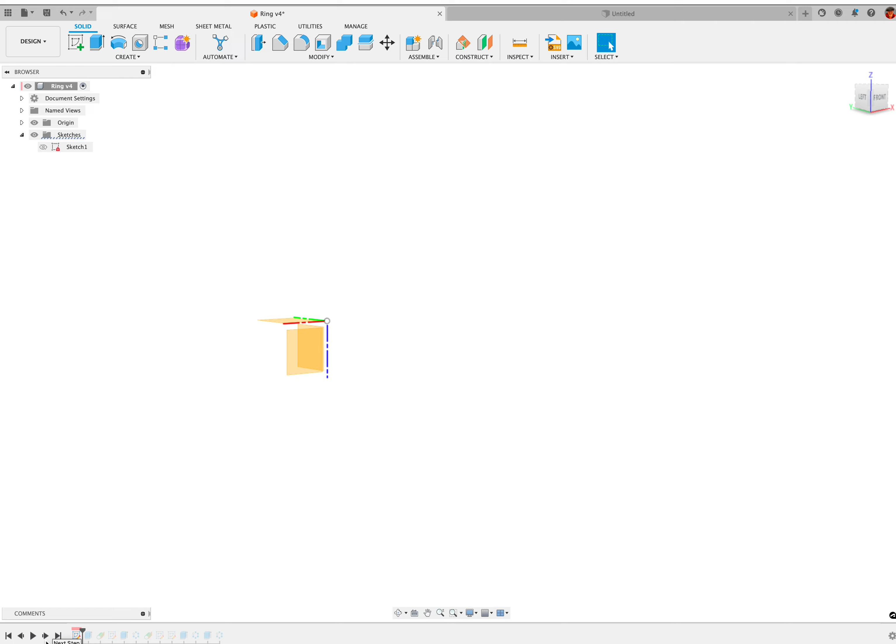All right, so here, this is a pretty normal looking origin in Fusion 360. The first thing I did was to create a sketch here, and we've got two concentric rings. I dimensioned the outside to 70 millimeter diameter and the inside to 60. You're going to need to measure your tailstock and figure out what it should be, and then extruded that in a normal fashion.

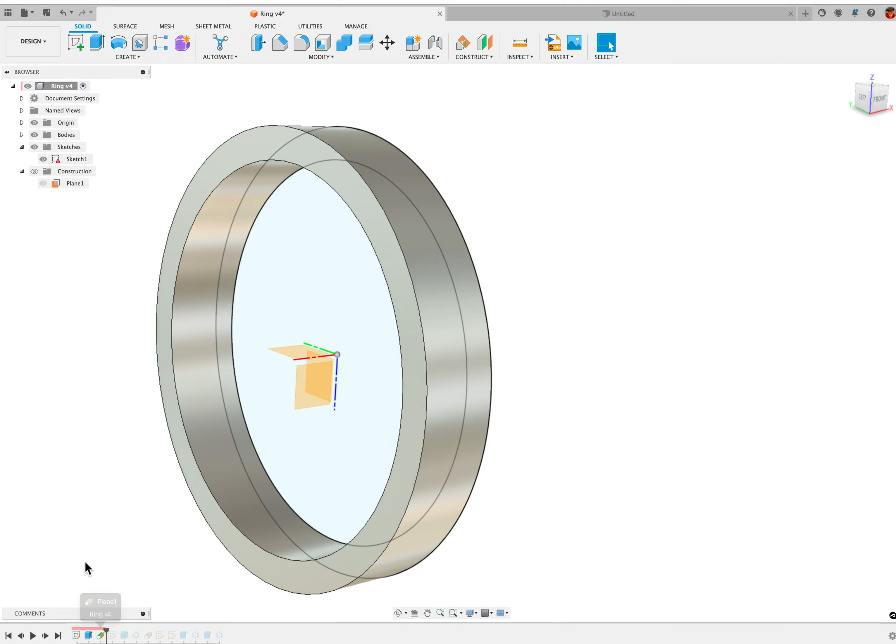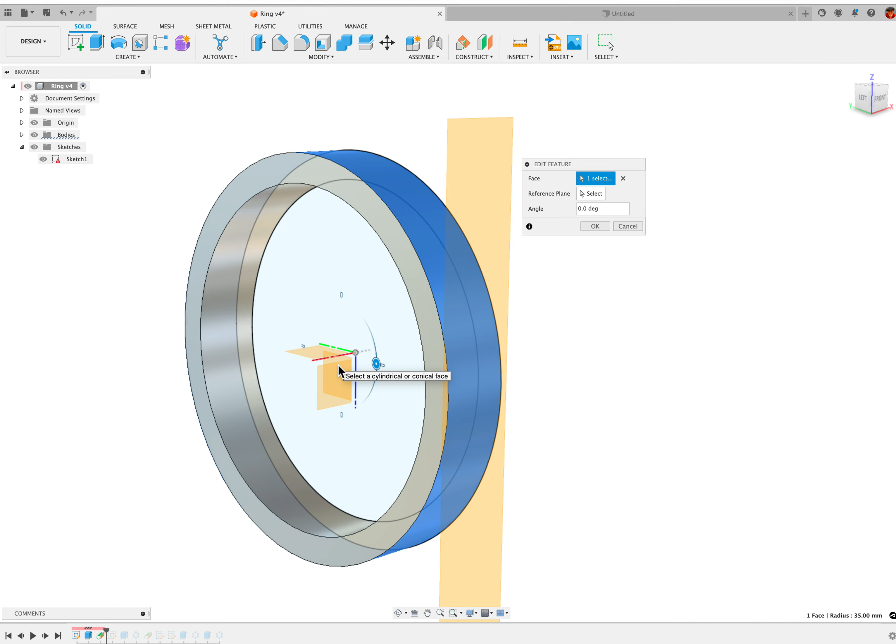So there's our ring, and then the next thing I did was to create a construction plane. Let me show you what the specification looks like for that; we'll edit that feature. So the face is outside of the ring, and this is a tangent plane. I specified tangent plane, and then it needs to know the face, which is the circular feature on the outside of the ring. It also needs to know the reference plane, and that was this center in here, and then the angle was 0.

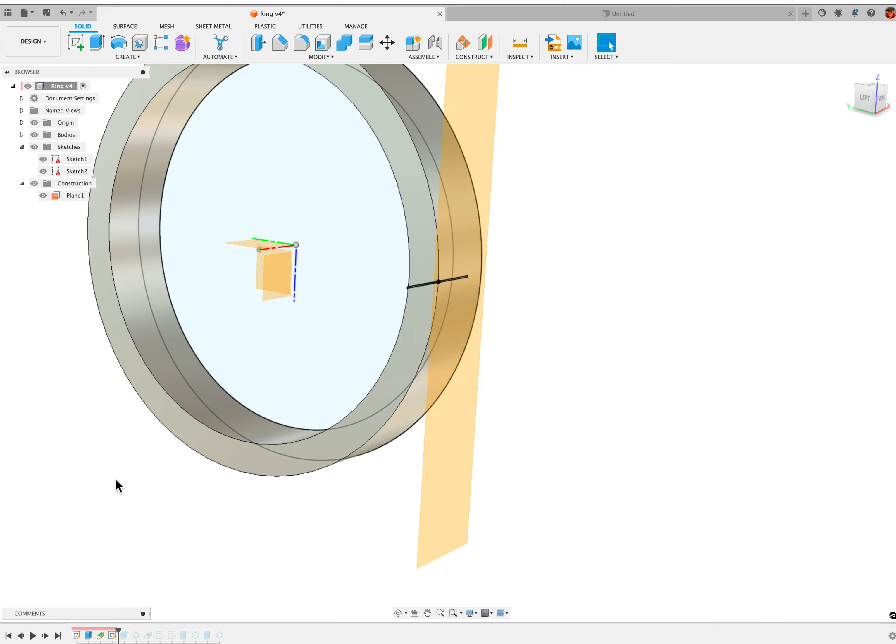So now we've got a construction plane on the outside of this ring that we can sketch on, and that was the next operation. So we created... let's see, what did we do here? There it is. Why isn't it showing? There we go. So there's our second sketch, and you can see it's nothing more than a rectangle.

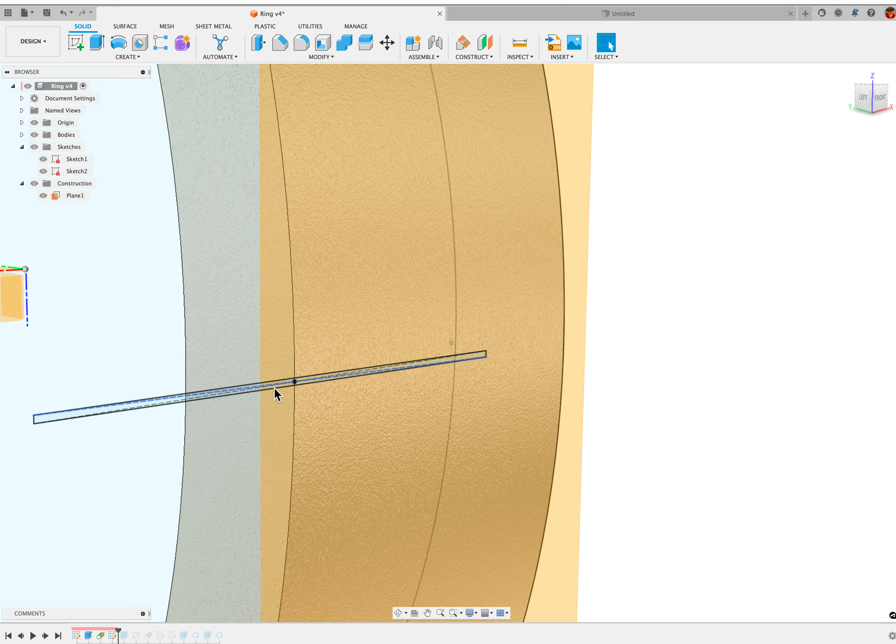I think I have specified 16 millimeters in length and 2.2 millimeters wide. I used a center rectangle and used this edge of the ring as the center. So now that's one of the tick marks.

Then the next thing to do was to extrude that into the ring itself. So let's turn off the construction plane and turn off the sketches, and you can see that that's what's been done here.

Just for grins, let's look at that feature. So it was simple. It was a -2 millimeter extrude as a cut, and that was all that was. So that was pretty simple.

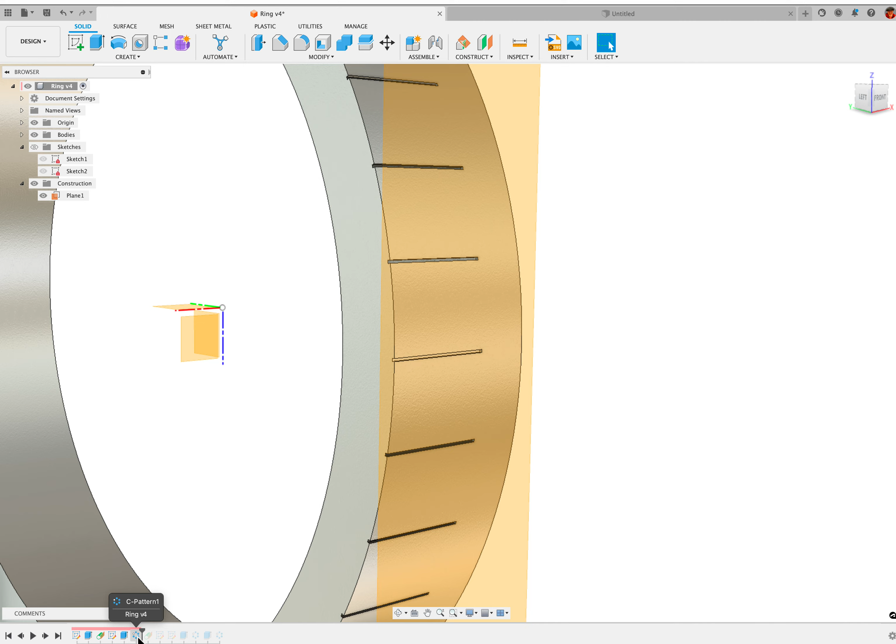I'm going to turn sketches back on here because we're going to need them here in a minute. Then the next thing was to do a circular repeat of that feature, and this is a pattern, circular pattern, which you can find right here. This one here. So here were the specifications for that. I was doing a repeat of a feature and selected...

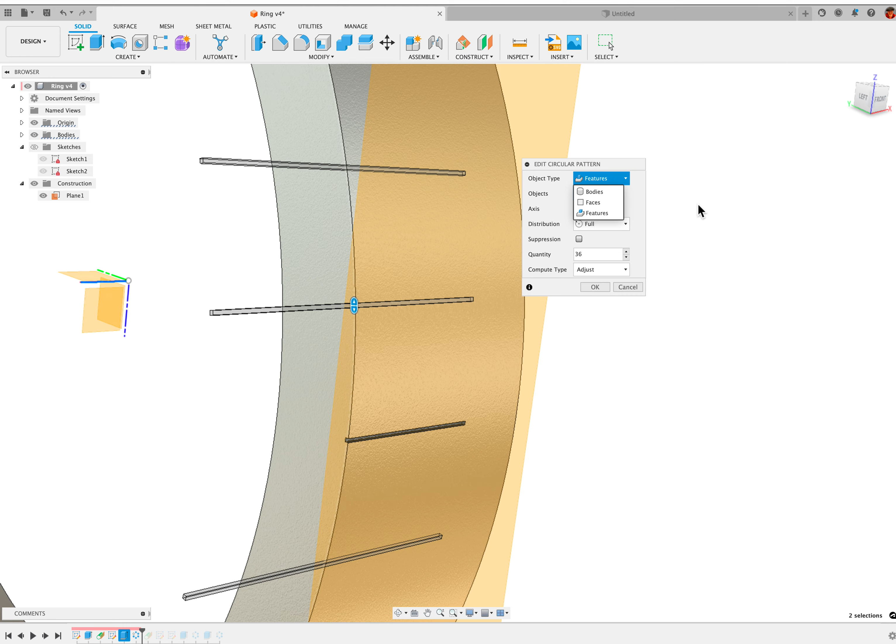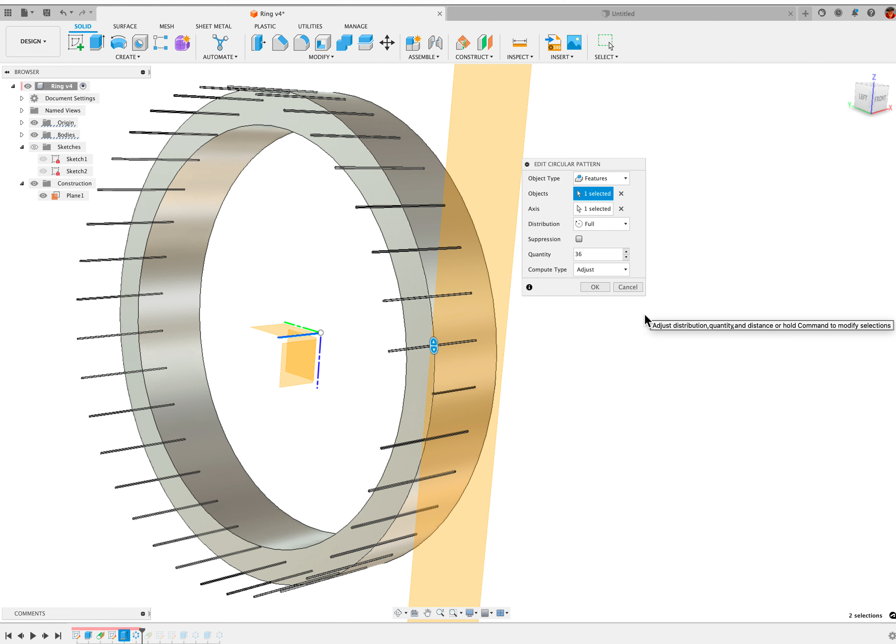...this feature right here, and then the axis was this center axis right here, a full rotation, and I specified 36 of them, thinking this is a 360-degree circle. Obviously your lathe dials are probably not that; you may have two, one for inches and one for millimeters. And the number of tick marks you want around the circle is going to vary depending upon how your ring is actually constructed. So that's what got us those long tick marks around there.

Then the next thing I did was I wanted to start working on the intermediate tick marks between the larger graduations. To do that, I created another sketch plane. You can see it here, and if you look at the side, you'll see it's on an angle. It's tangent to the outside of the ring, but it's at an angle. Let me show you how I did that.

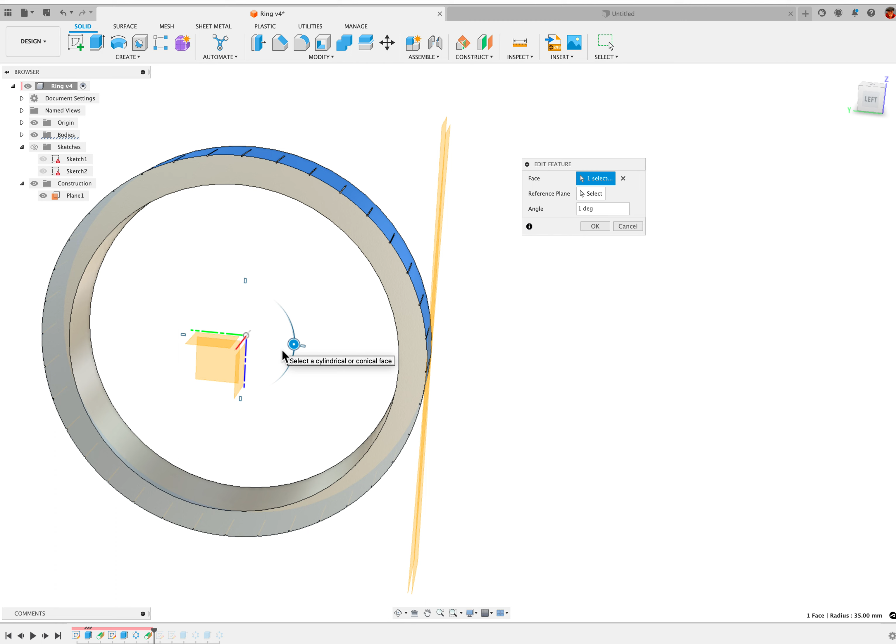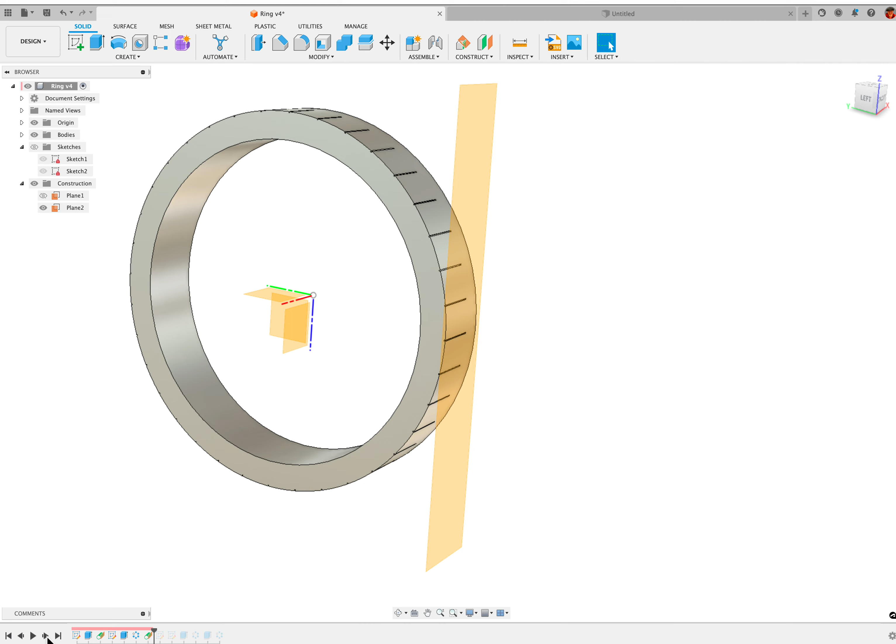So I specified a 1 degree angled offset from the reference plane here in the middle, and we've got that now. We can turn off the other one, but we now have a sketch plane that we can put other features on that are 1 degree offset in terms of clocking rotation around the center axis. So the next thing I did was I created another sketch, and it's right here. Let's see if we can turn it on.

You can see it right there. Let me turn off the origin. That's the sketch, and it's nothing more than a line on that origin axis.

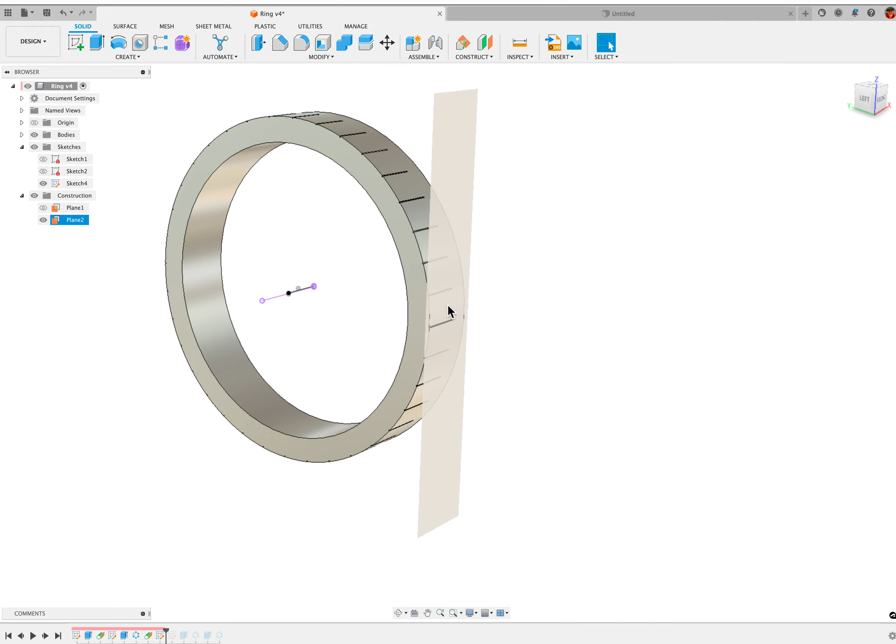The reason I wanted that is I wanted to be able to project that out to this plane so that I can use it as a reference for the geometry I'm going to create with another sketch on this plane. So the next thing I did was actually do that.

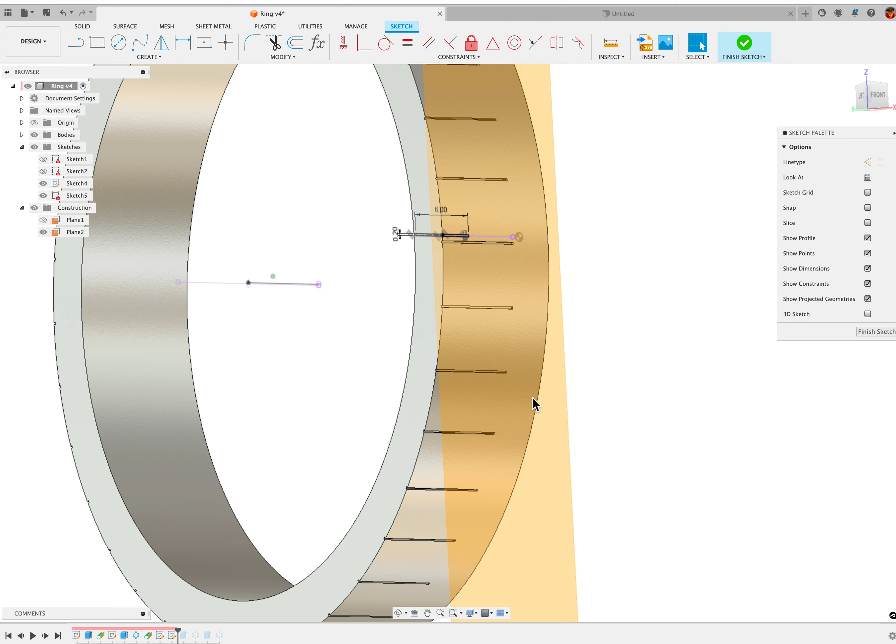I created a sketch here. First thing, let's see if we can... So it's right here. But as you can see, that purple line in there - let me turn off the construction plane. That's this feature I had drawn before, projected out to that construction plane that's 1 degree off in rotation.

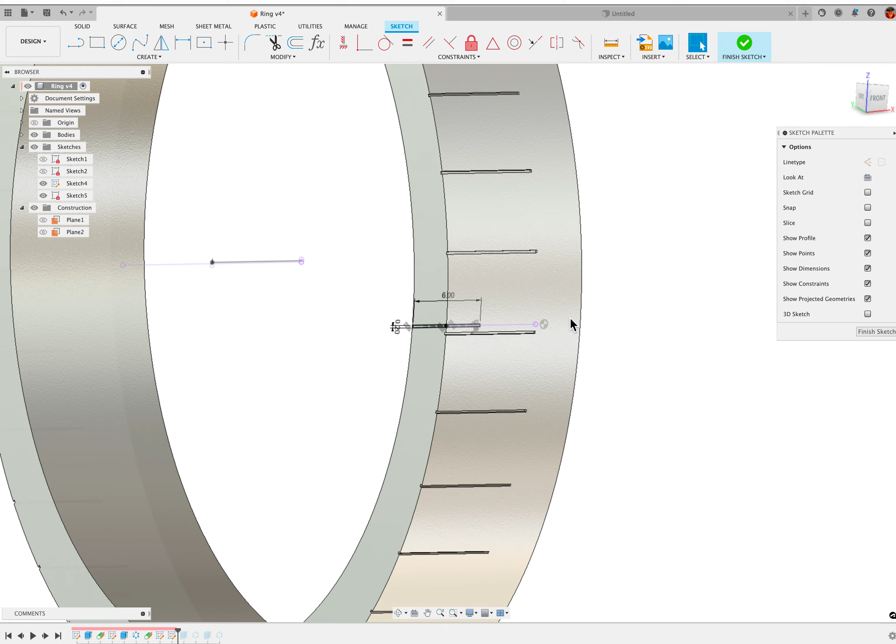And then I used that with a center point rectangle to create another rectangle here on that sketch plane that's narrower. So in this one it was specified as 12 millimeters. This one's 6. So you can probably guess what's next.

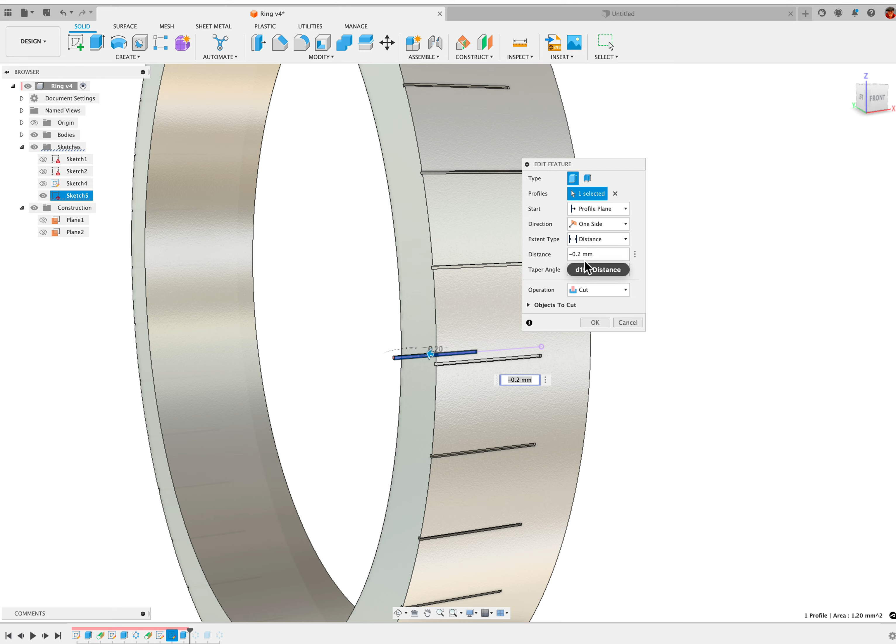We'll finish that sketch. The next thing was - let me turn off the sketches here - to extrude that into the ring again with another cut feature 0.2 millimeters deep. That ought to be pretty understandable.

And then the next thing is another circular pattern, but I didn't go all the way around. You'll know why here in a minute, but I did create 9 tick marks here in between these 2 longer tick marks. So I'll show you the spec on that.

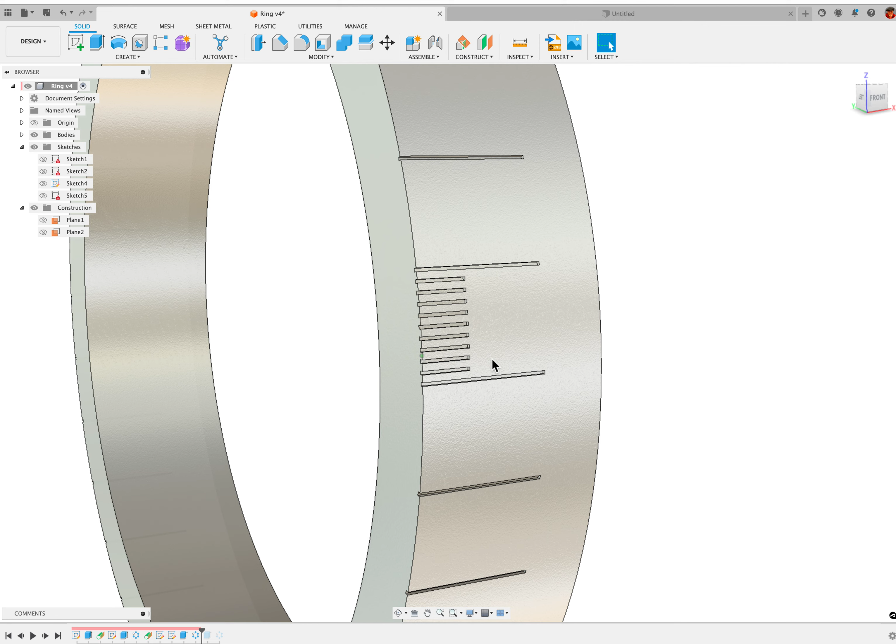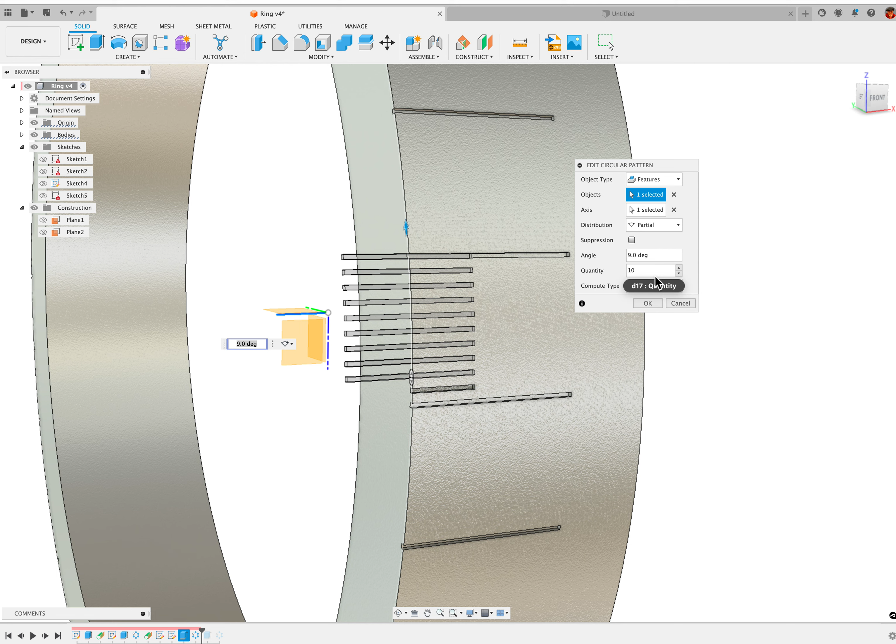It's actually 10 tick marks, sorry about that. So again, doing a circular pattern of features around this object using this center axis of the origin as the rotation axis. It's a partial distribution across 9 degrees with 10 units, and that's what gets those etchings in there.

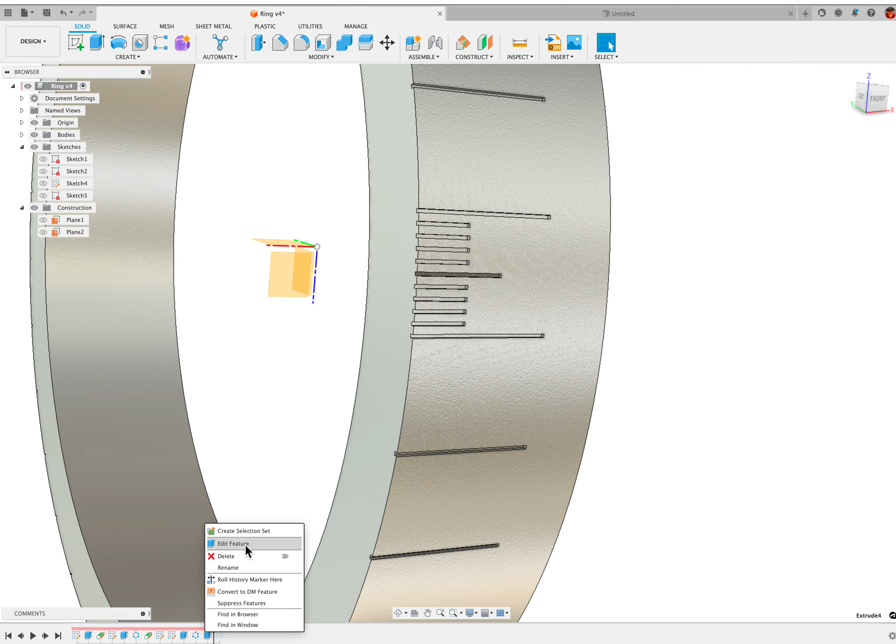Then the next thing was I wanted the center mark longer than the 4 on either side of it, and to do that I used an extrude command, and I simply took this face of that center feature and did another cut extending it 2 millimeters out. So now we have a long center line, not as long as the outside, but I think you get the point.

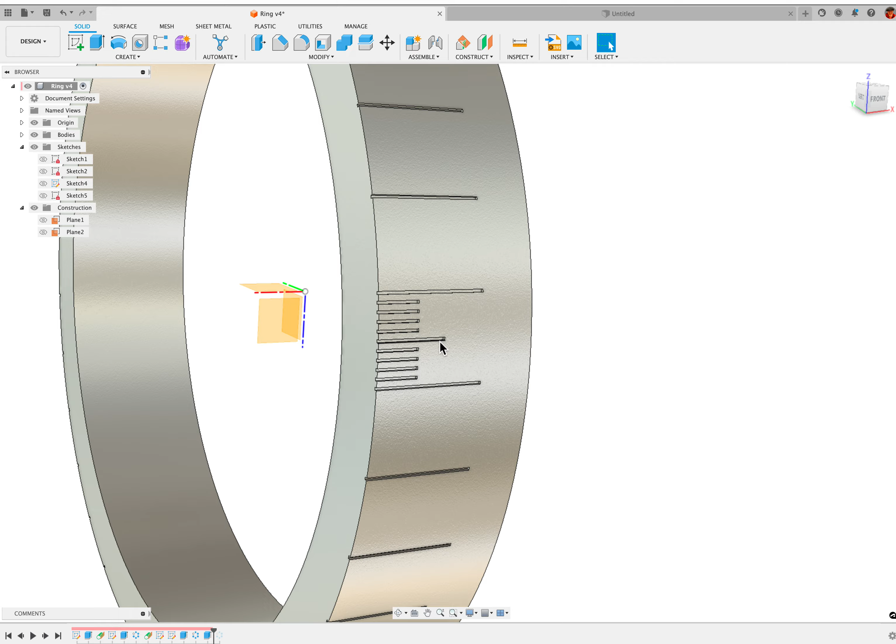And then the next thing was to circular pattern all of these features from this one here to this one here, all the way around in a circle. And we'll do that here. Now this takes some time, as you can see down here, because it's got to compute all the geometry and all the tangencies - it's kind of compute intensive.

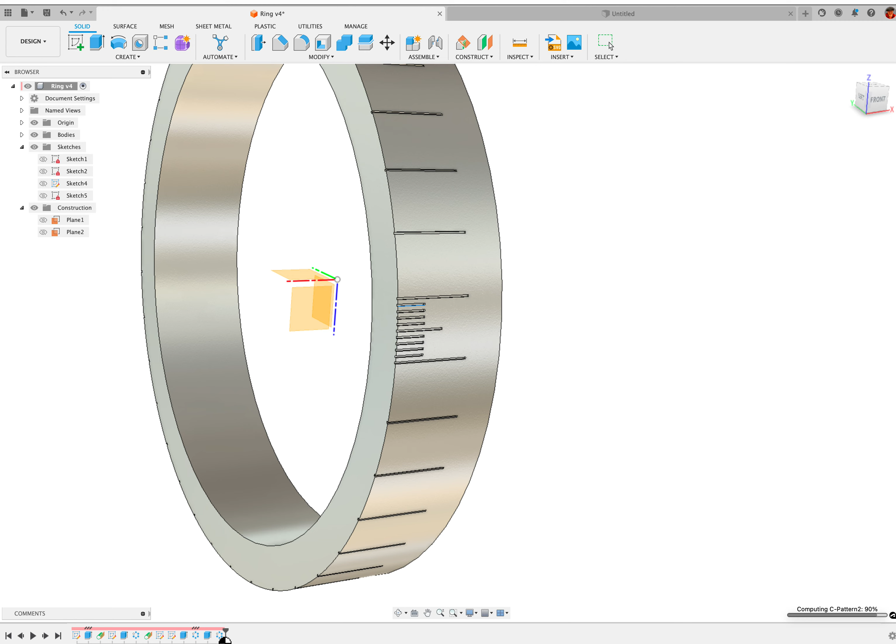Once it gets done, I'll show you the actual spec on that circular repeat. But here, let's take a look. So full rotation again, 36 of them. I picked up all of these features, as you can see, and that's what we got.

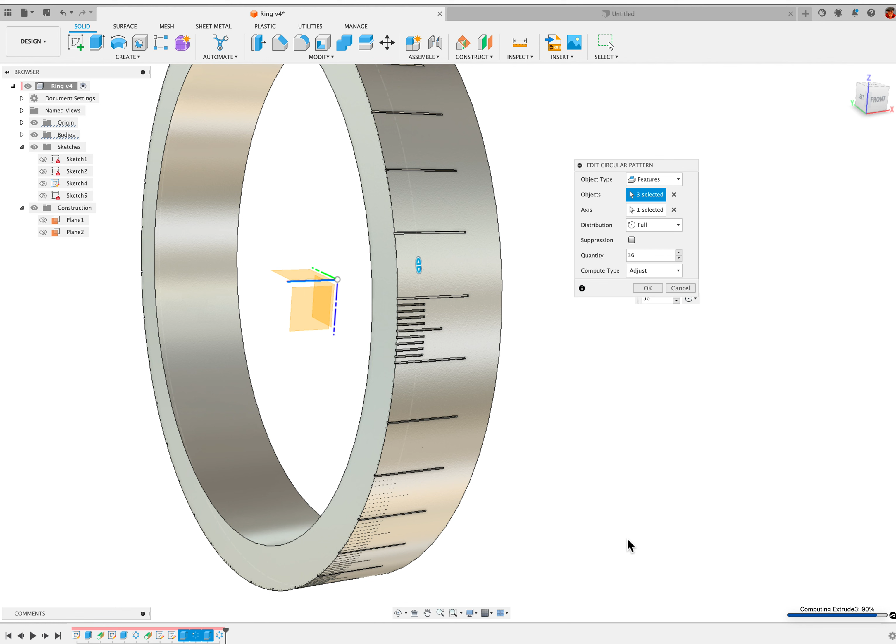Now, in terms of laying text around here, you can certainly do it this way by creating construction planes all the way around the perimeter, offset however many degrees that are necessary. A better approach might be to lay down your text as a text string and then use that to apply the text to the outside surface of the ring, using one of the edges of the ring as the flow pattern for the text.

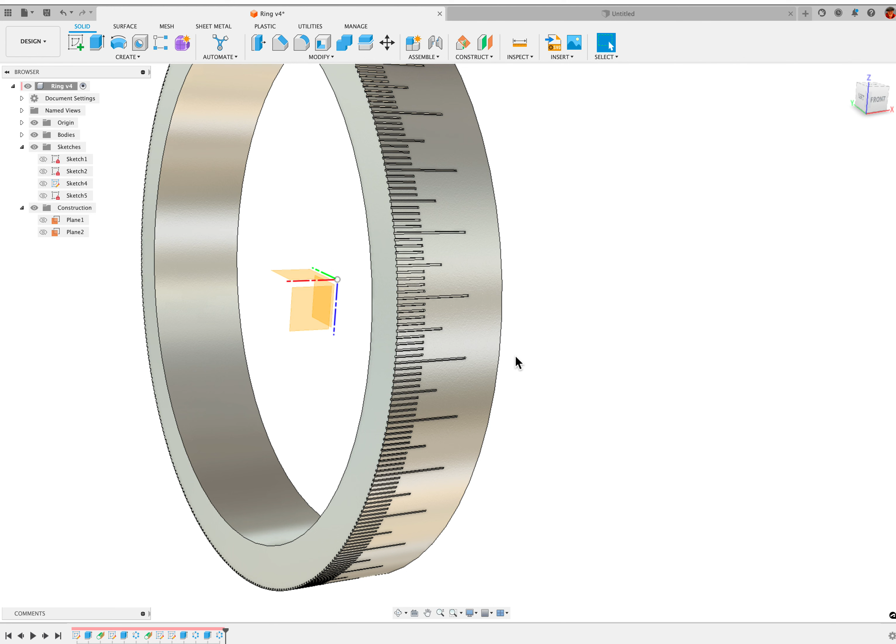And if you want some suggestions on how to do that, let me know. It's a different technique than I'm using here, but hopefully this will get you started. Let me know if this helps. Thanks.